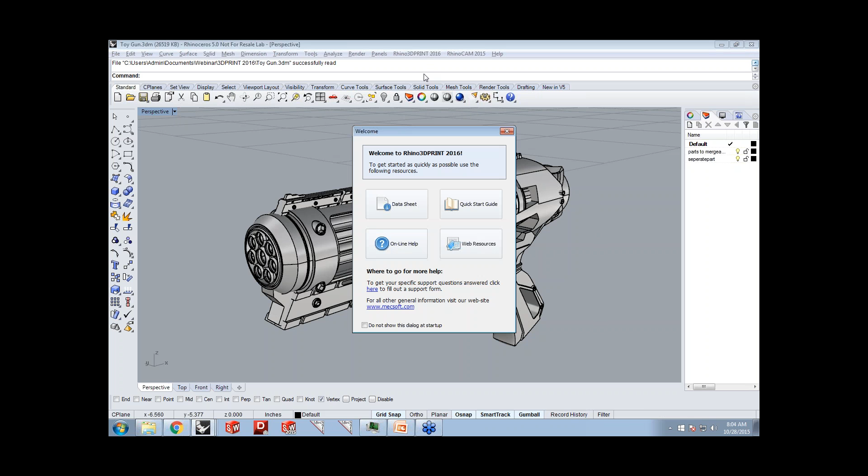Now, once you have Rhinoceros loaded and Rhino 3D print installed, you will notice right at the top of your screen a Rhino 3D print menu appears. Selecting this menu gives you a pull-down menu of options, and when you click on Welcome, this gives you access to the data sheets, quick start guide, your online help, and web resources.

So we're going to click on Rhino 3D print and then select Browser. This displays your Rhino 3D print browser interface in Rhinoceros. The browser by default is docked over to the left side of the screen. You could actually have it floating or docked to any location in your Rhinoceros application interface.

Now, the browser offers 5 main tabs. You have the Create tab, which offers creating tools. You have the mesh primitive modeling tools. You could create mesh from point clouds. You can convert solid surface to mesh geometries.

The Model tab offers you powerful Boolean tools like Boolean unite, subtract, intersection. We've also introduced intersection and split in the 2016 version. And we have split and offset and hull tools as well as slicing. So the offset and split would result in a shell which can be used for your 3D printing applications.

Now the Inspect and Modify tab offers analysis tools where you can perform reflection line analysis, curvature, you can compare two meshes, mesh modification tools like mesh reduction, remeshing, mesh smoothing, and the 2016 version also introduces mesh manipulation where you can individually select areas of the mesh to manipulate it. And as we go through today's webinar, we'll try to touch upon all these topics.

The Repair tab offers a powerful set of mesh repair tools starting with Stitch and Close. AutoFix can be used to automatically fix holes, self-intersection, and incorrectly oriented triangles. We are introducing Manual Fix in the 2016 version where you can manually fix holes using different options for fixing the holes and perform a diagnostic check to check for open edges and other issues on a mesh geometry, and you have options to separate, fix, and flip orientation of mesh.

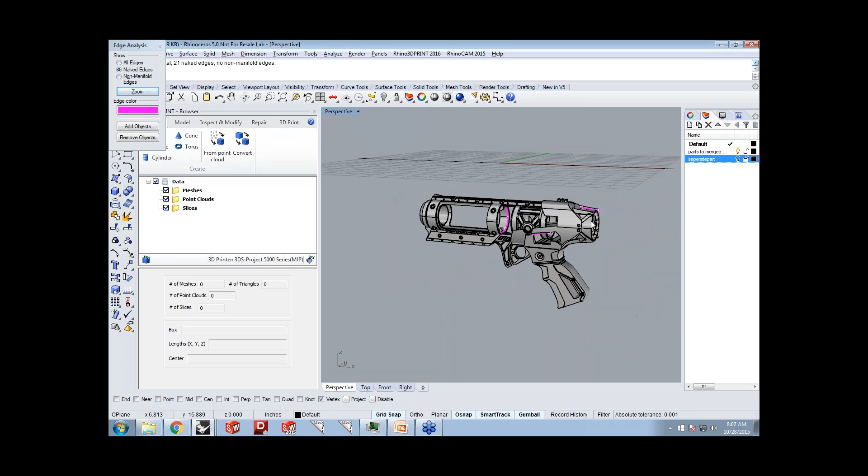And first thing I'm going to do in Rhino is look for open edges. There's a feature called Show Edges where you can actually select the model. Then when you look for open edges, or Rhino calls it naked edges, you'll see that there are several open edges. So just converting this from a polysurface or surface to mesh is not going to make us able to print the model out. Fixing these open edges on a polysurface is going to be a time-consuming process, and then converting it to a mesh.

First step I'm going to do is convert this to a mesh. Now you can convert it using the 3D Print Convert tool in here, or you can use the native Rhino tool if you prefer. You can go from mesh from NURBS object, and you basically select all of your geometries, and then you use the mesh options in here to create a mesh. So let's go ahead and click OK.

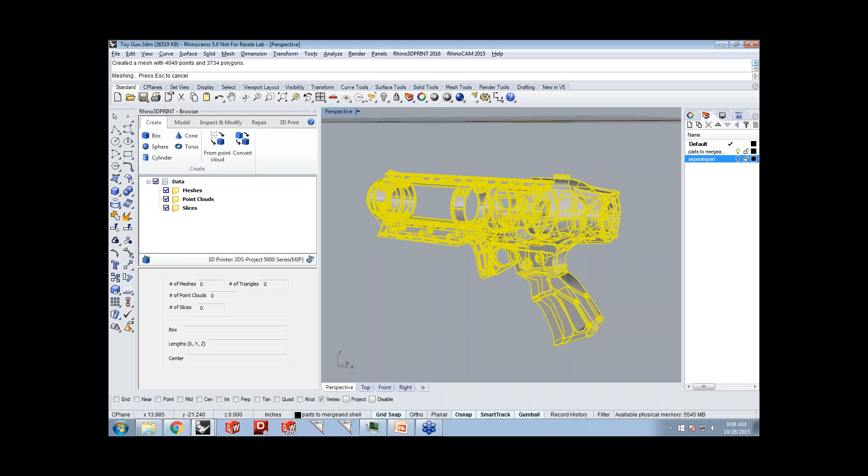And you will now notice that once the mesh is created, the data tree in the 3D print browser will list all of the mesh geometries. So we currently have 26 meshes that were created from this geometry. So I'm going to select these meshes and just have them on a separate layer in Rhino. And I will go ahead and turn off the polysurface geometry in here. So we got all of these meshes.

Now let's go to the Repair tab and run a diagnostic check on this mesh to determine the number of open edges. So I'm going to select the mesh and press enter. Now what I'm looking for is open edges, and I'm going to run some checks. Now you'll notice that the open edges have been identified, and they're showing up on the model marked in red right there. Now to manually fix all of these meshes, it's going to be a time-consuming process.

So we have a very powerful tool in here called AutoFix. So I'm going to use this AutoFix tool, which automatically looks for holes, self-intersections, and any incorrectly oriented triangles, and will automatically fix the mesh. You notice that the AutoFix ran, and it automatically fixed all of the meshes.

Now you'll notice that there are several of these closed meshes on the model. So if you need to print this as one single geometry, we need to merge them or unite them to a closed mesh. So I'm going to go to the Model tab and use the Unite tool, and I'm going to merge all of these meshes into one closed mesh. So now the Unite process resulted in one mesh, and you can see it has close to 180,000 triangles on it.

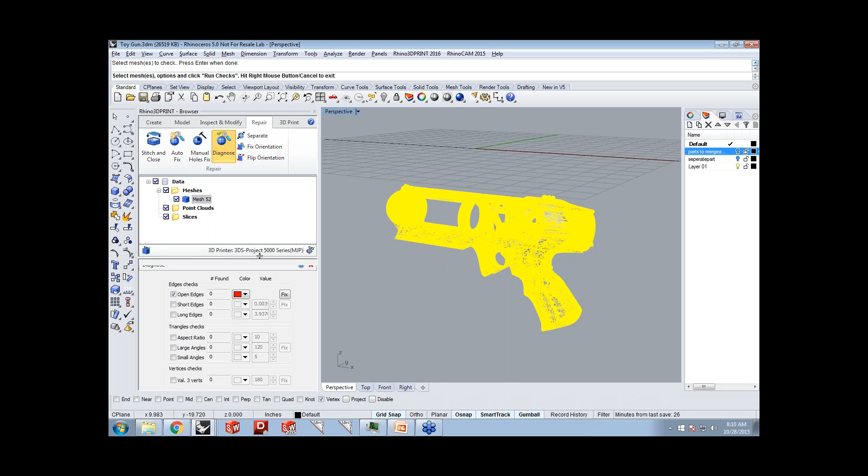Now let's go back and perform a diagnostic on it to make sure all of the meshes are closed in here and see if there are any open edges. So when I run a check, I'm notified that there were no issues detected, which means the mesh is closed. That's great.

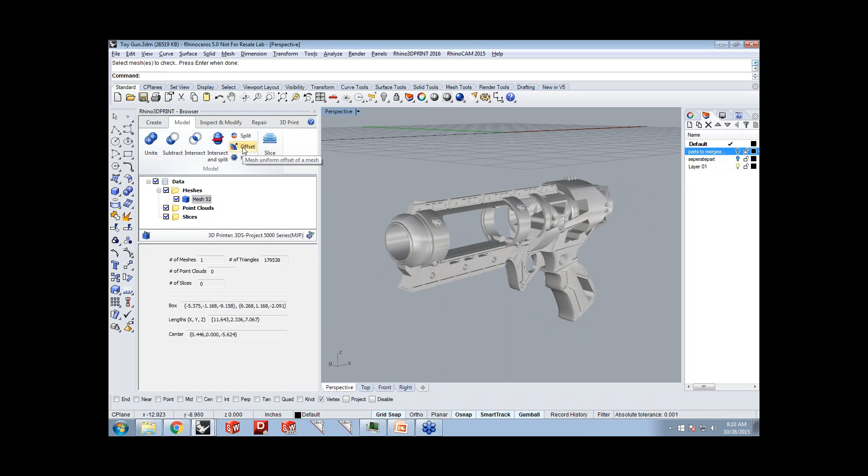Now let's take a look at what are the other nice features that we offer in Rhino 3D Print. Now before you want to print this part, you may want to insert some battery packs, so you may want to have some wall thickness. So one of the ways to create a wall thickness is using a process called offset mesh. So if you go over to the model tab, you'll see the feature called offset mesh. So I'm going to use the offset mesh tool and select the mesh to offset. And the offset parameters in the dialog below allow you to specify your offset distance and a tolerance to offset.

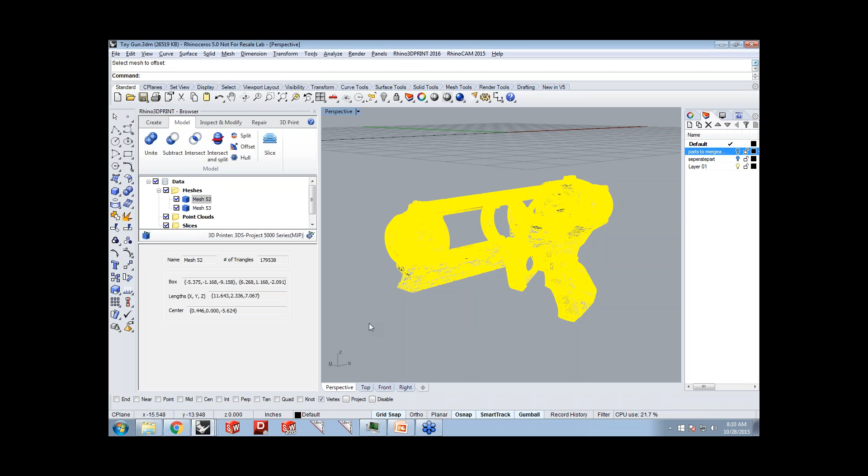Now specifying a negative offset distance and offsetting the mesh will offset the mesh towards the inside, which means it's going to make the resulting mesh smaller than the original mesh. If you specify a positive offset value, it's going to basically make the mesh larger. So you can see that we now have two meshes in the data tree in here. You have your original mesh and you have the offset mesh that's inside. So I'm going to toggle the visibility of these meshes in the tree so I can see the two meshes.

Now one of the nice features that Rhino offers you to view the model is you can actually insert a clipping plane in here, and you can take a look at the two meshes that are created by inserting a clipping plane. So I'm going to go into the visibility tab and quickly add a clipping plane in Rhino from one of the side views. And I'm going to select this clipping plane and I'm going to enable that.

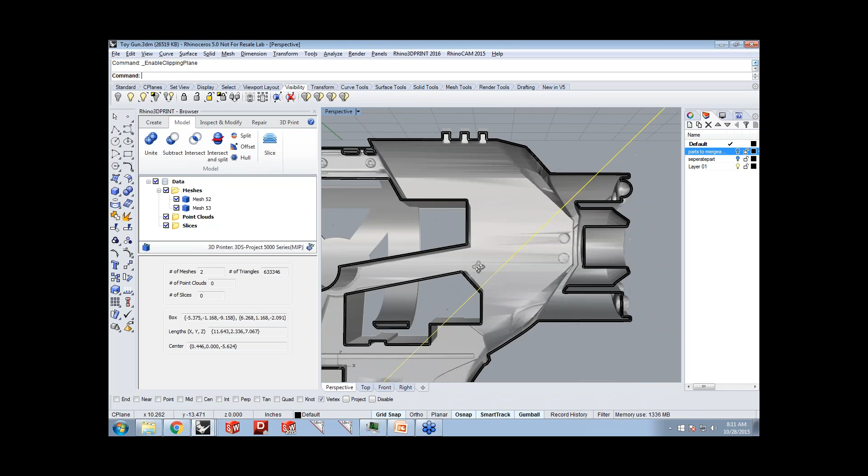So you'll now notice that when you take a closer look at the model, you can see how well the offset is performed, and you can see that the offset has a uniform offset for the offset distance we put in there. So take a look at that. Such a complex model and has a very nice offset on it.

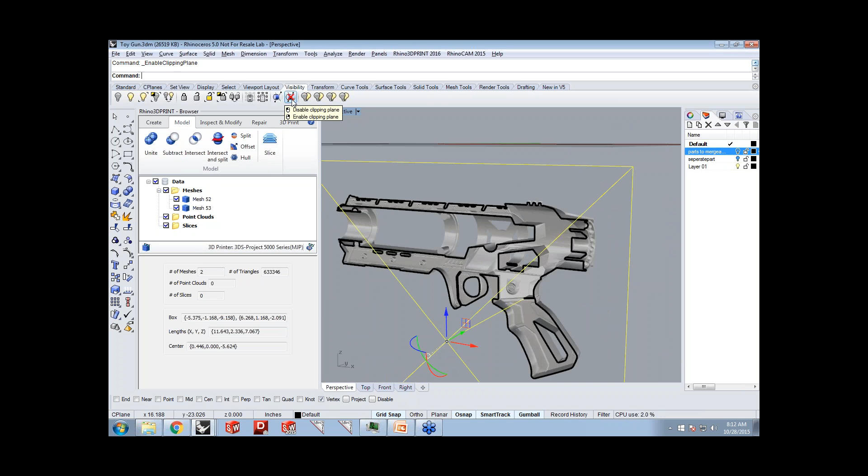Now the next step I'm going to do here is I would like to split the two meshes, the original mesh and the offset mesh, and I would also like to have this gap closed, or I want to cap the gaps between the two. So here's how I'm going to do it. So first let me go ahead and disable the clipping plane in here, and I'm also going to go ahead and disable it from the front view, and I'll hide the clipping plane.

Now we have a powerful split command that's built into the model tab. I'm going to use the split command, and the split basically works in the view that you're currently active on. The splitting plane will be parallel to your active construction plane, and I'm going to select the two meshes to be split, and then when I select the command, I'm given an option to pick the bounding box where I want to split. By default, it'll use the midpoint of the bounding box, so I want to split it right in the center as you see it.

And we have two options, whether you want to cap the results after you split it or do not cap it. So in this particular case, I would like to cap it, and I'm going to select split. Now one of the things I would like to point out here is the splitting process could take anywhere from a few seconds to several minutes as it goes through a complex process of splitting the mesh.

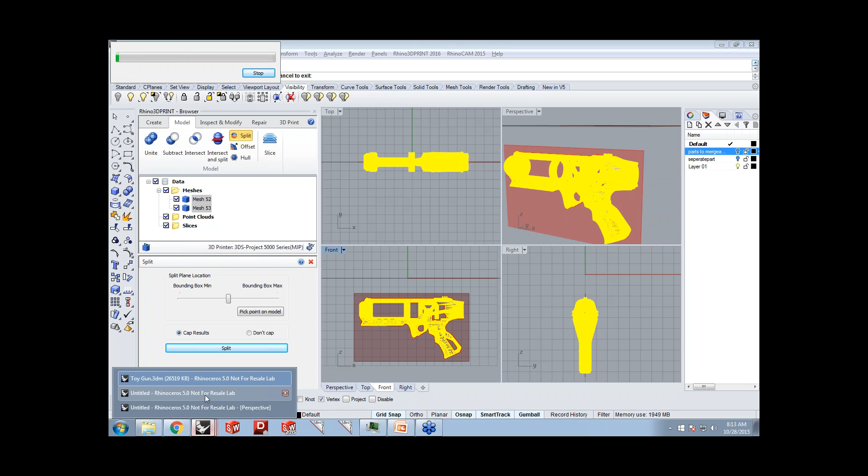Now while we are waiting for the mesh splitting process to be completed in here, what I'm going to do is show you some of the other powerful tools that are offered in our Rhino 3D Print products. So I'm going to go ahead and switch over to another session of Rhino, and I will get back to the part once the splitting process is complete. We'll go back and check on it in a moment.

Now one of the nice tools I want to show you that we have introduced in the 2016 version is how to manually fix meshes. So I'm going to go ahead and bring in an example in here, and as you can see here I have a mesh model, and if I go ahead and perform a diagnostic on the model in here, you will notice that there are several open edges on it.

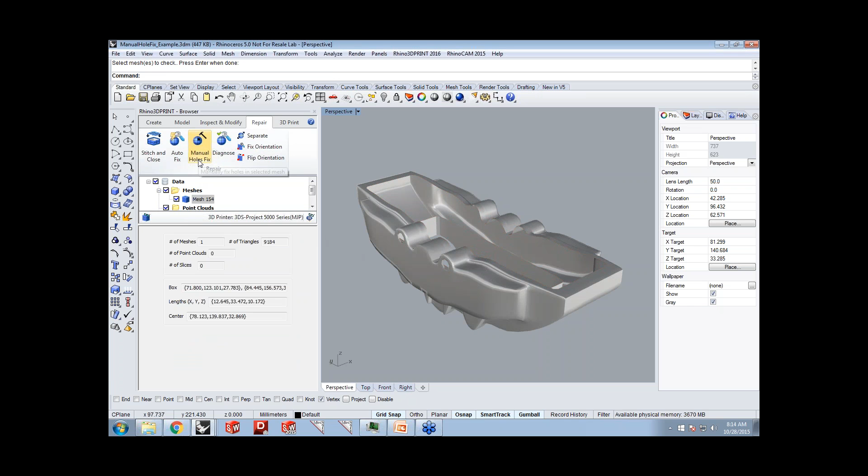Now performing an auto fix will basically just close these meshes, but that's not how you may want to be fixing the holes. So we have added a tool called manual hole fix, where you can actually detect the holes and you can choose what type of fix you would like to apply for it.

Now for example, when I select the hole in the list in here, it highlights the edge where there's a hole, and you can choose what type of fixing you would like to perform. If you select the fix type as fan and preview the fix, it shows the resulting mesh that's going to be added after it's fixed. In this particular case, I could choose planar, and you can see the result of the planar fix.

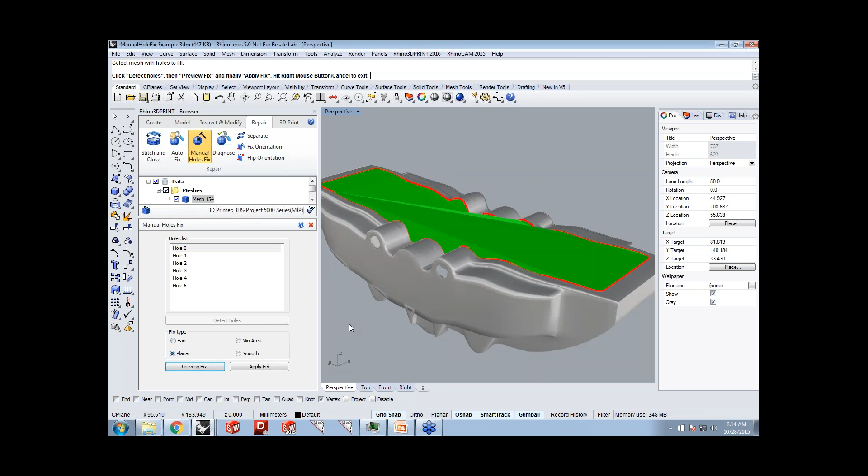Now the ideal option would be here to use a smooth fix. When I preview the fix, you can see that the mesh actually follows the holes that are being fixed, follows the kind of wavy surface on the mesh that you see right there.

So I'm going to hit preview and then apply fix, and you'll notice that this is a very powerful and handy tool where you can pick areas, pick certain holes and fix them the way you need it. So this is one of the new features that are being added in the 2016 version of our 3D print module.

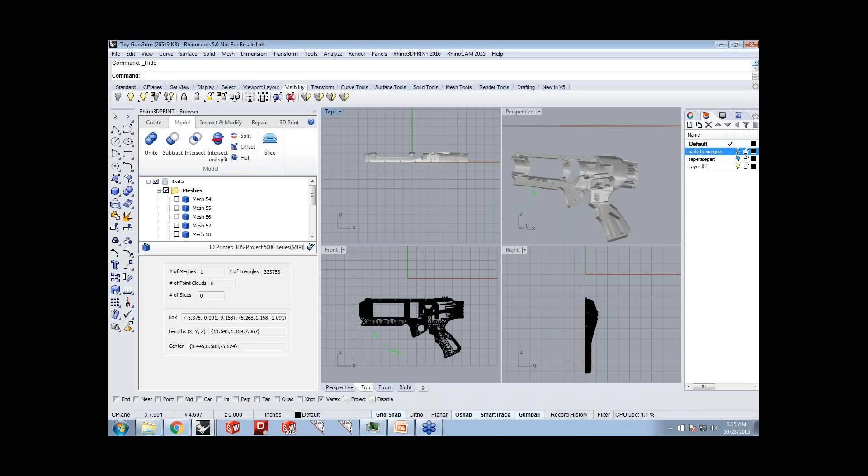Now let's go back and take a look to see if our splitting mesh was done. There you go, it was done. So let me go ahead and take a look at the result of the mesh right here. And now we can see that the splitting process did split the two meshes, and it capped the result. Which means it capped the gap, so you have a wall thickness in here. Now the part is ready for 3D printing.

Now if you want to go ahead and print this part, you would want to first make sure you select your printer in here. So you can go to the 3D print tab, you pick a printer, and we have a list of printers that you can select from. Newer printers can be added to the list. There's an XML file in the install folder where you can go ahead and add new printers, and if you need any help with that, feel free to contact us and we can help you out with that.

Once you select the printer, if the printer reads G code, you can specify the nozzle diameter of your printer and save the information. In this particular process, I'm just going to close it and then display my printer's volume. So once you have the printer's volume displayed, in this particular case, I need to orient the part, so I can use the Gumball or any of Rhino's transformation tools to rotate the part.

So once the part is rotated, I could then use the fit option in here to fit this model into the printer's volume. Select the model, and then I can choose the alignment option. For the Z, I would like to place it to the bottom and then have it centered in X and Y, and I can pick fit.

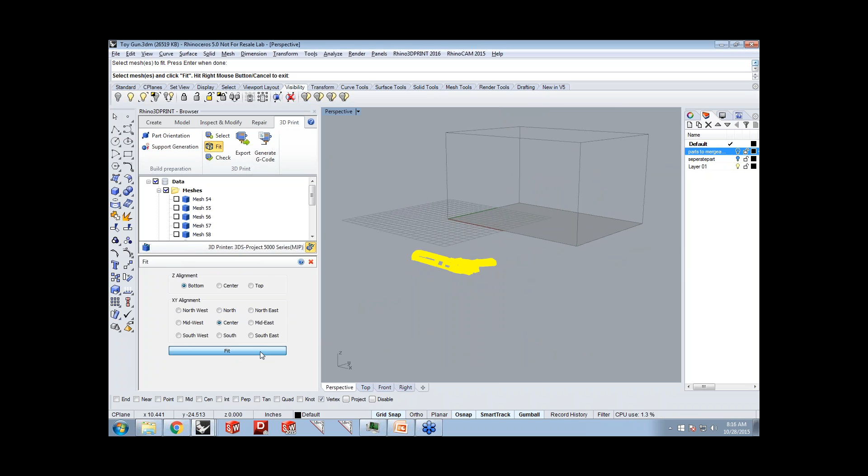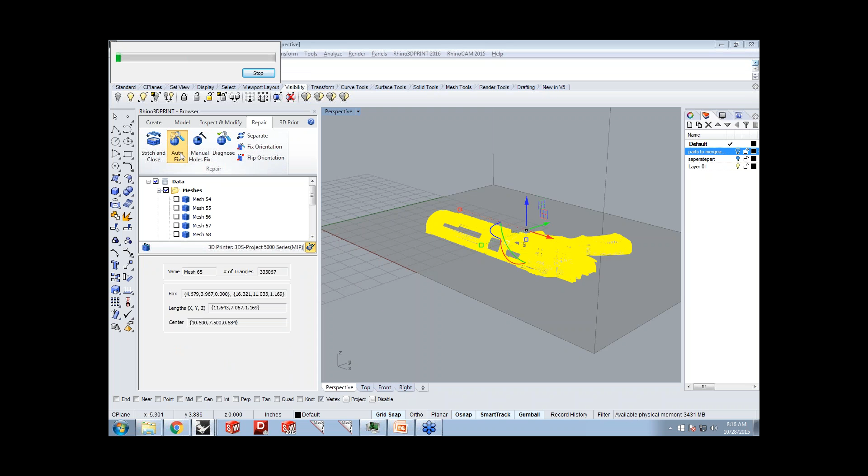Now once it's fit, I can go ahead and perform a check to see if the mesh is closed. I can run a check, and if there are open edges, you'll be notified saying mesh is not closed in here. You can see that the mesh is not closed, so I can go back and do an auto fix on it to close this mesh. And then I can go back and check and then export out as STL, SLA, or AMF to a printer. We'll talk about the G code in just a few minutes.

So this would be a typical workflow of how you would fix the mesh, how you would orient it, how you'd have it aligned, and then finally you want to do an export where you can export out as an STL, SLA, or AMF, or we'll talk about the G code generation in just a few minutes.

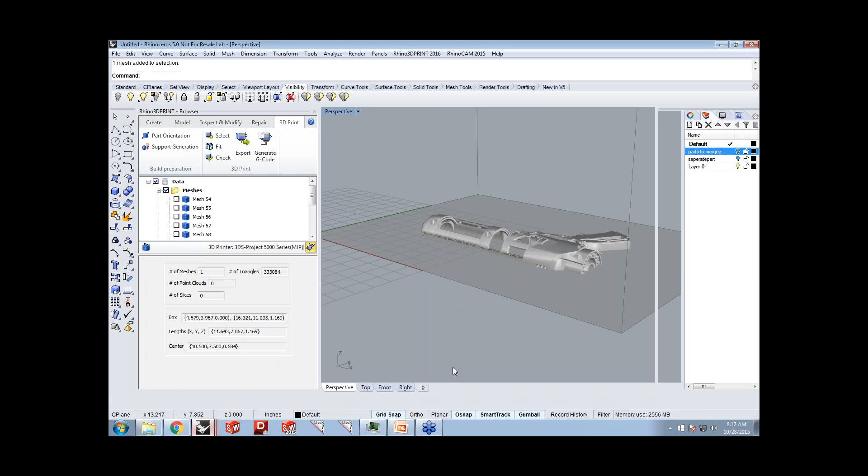Okay, so this would be one of the applications where you would be starting out with a solid surface geometry and convert it into a mesh geometry, fix all the errors and issues that you find in the mesh, and perform offset and split to get the model prepared for 3D printing. Now let's take a look at an example where we would like to work off scan data. So I'm going to go ahead and import in scan data.

So I have a scan data model here, and this particular model is in ASC format. So the spacing or the delimiter is a space. So the way the data is saved in the scan file and the point cloud file is by spaces. Now you can see that as I loaded the point cloud data here, the point cloud information appears in your data tree, and selecting this in the data tree displays the total number of points that are in this particular model. So you got close to 500,000 points on it.

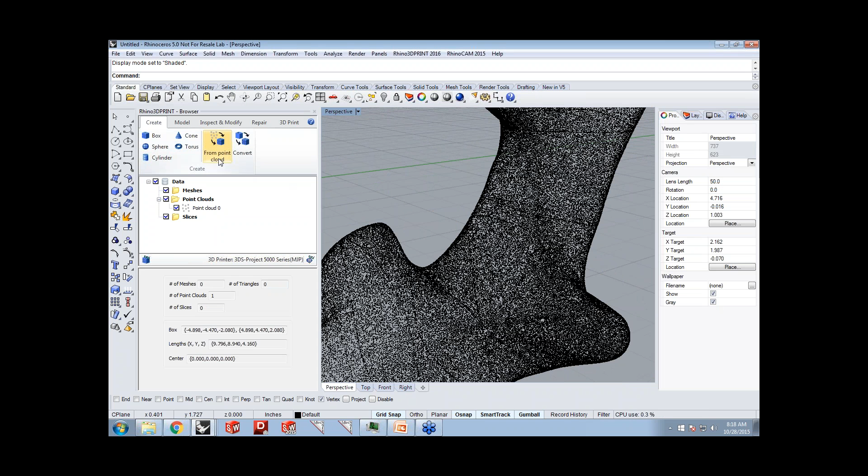Now with just these points, you'll not be able to output these points out to your 3D printer. So you need to basically go through the process of creating a mesh from the point data. So we have a very nice tool called Mesh from Point Cloud. So we're going to select this, select the point cloud, and press enter. Now you can specify the options for creating the mesh. I'm just going to go with these default parameters in here and select create. So in this process, a mesh is created from the point data.

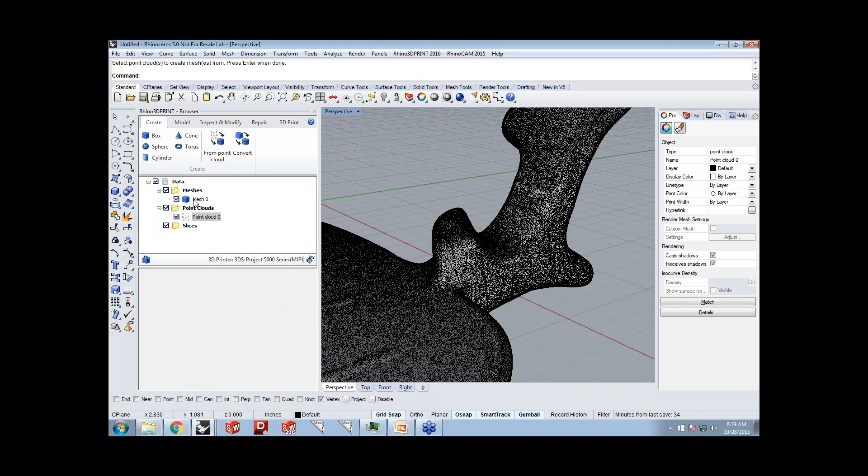So once the mesh is created, the mesh automatically would appear in your data tree under meshes, and you can take a look at the mesh that was created and then see if the mesh is ready for printing. Now you can see that the mesh is already created, and I'm going to go ahead and highlight the mesh. Now just for convenience purposes here, I'm going to turn off the visibility of the point data so it's easier for us to view the mesh, and there's the mesh right there. So it did a pretty good job of creating a mesh. However, the mesh does have several holes on it, as we can tell.

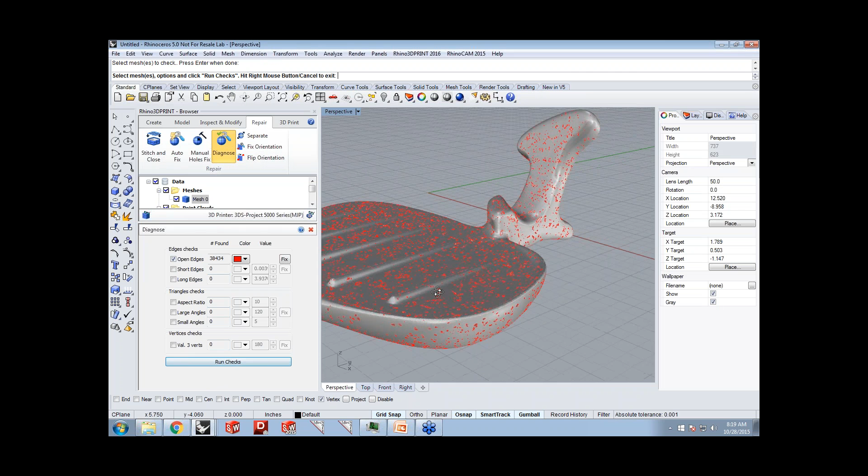So let's go to the repair tab and perform a diagnostic check on it, and let's go take a look at the open edges on it. So I'm going to hit run checks, and you'll now notice that on this particular part there's over 38,000 holes or open edges found in the model. Now to fix these holes or open edges manually, it's going to take several man-hours.

Now the auto fix is again a great powerful tool that'll help you fix these holes and self-intersections on large meshes like these. So I'm going to run the auto fix command in here, then select the mesh, and then right click or press enter, and I'll wait for the autofix to complete. Now this process could take anywhere from a few seconds to a few minutes depending on the number of holes to be fixed and the complexity of the geometry. While we wait on this process to complete, I'm going to go over to another example and show you some of the other powerful features that are offered in Rhino 3D Print.

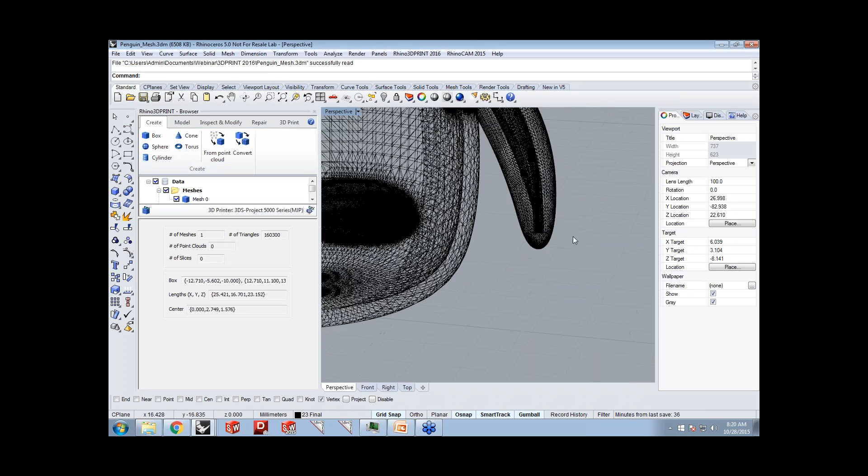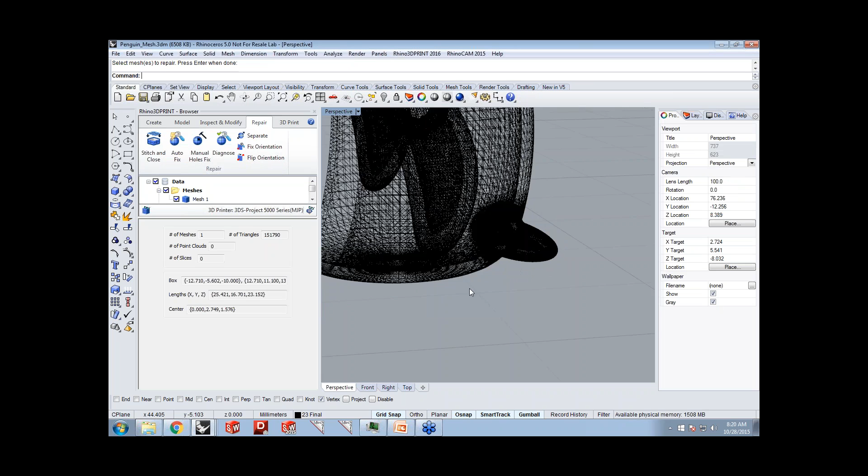Now one of the features I would like to show is how well the autofix can fix self-intersections. So I'm going to go ahead and take this model in here. There's basically two meshes; it was the inside mesh on this model. You can see that there's a self-intersection of the mesh. I'm just viewing it in the wireframe view so all of us can see the self-intersections on the mesh in here. So let me go ahead and run an autofix on this. So I'm going to go over to the Repair tab, pick the autofix option, just grab this mesh right there, and then right-click or press Enter. You will now notice that the autofix automatically fixed those self-intersections. That's one of the great ways to fix self-intersections.

Now let's also take a look at the stitch and close feature. So for this, I'm going to bring in another model where we'll take a look at how the stitch and close feature works. So I'm going to grab this part in here. This was basically a solid model which was converted into a mesh, and you can see that this particular part has over 400 open meshes. So just performing a join is not going to make it a closed mesh.

So we're going to use this powerful feature called Stitch and Close, which is offered in the 3D Print product under the Repair tab. And in this process, I'm going to select all of the meshes, and you'll notice that it's going to stitch all of this into a closed mesh. Now, after the Stitch and Close operation is performed, if we go ahead and run a diagnostic on it, you will notice that there were no open edges identified.

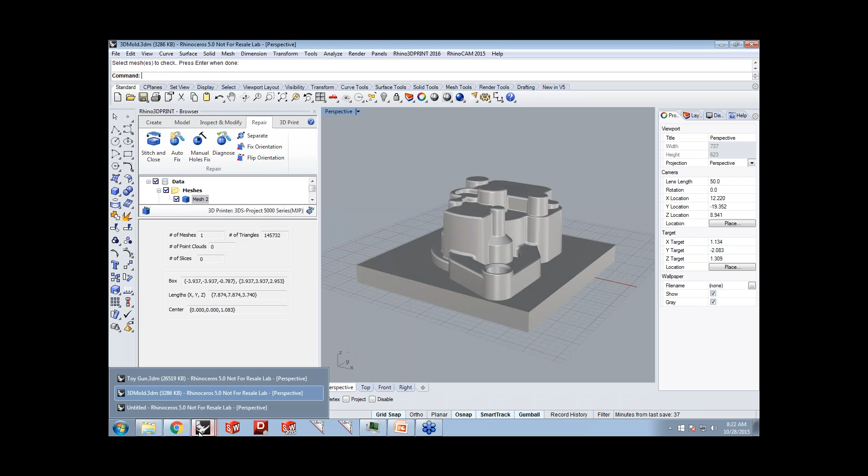There you go. So the Stitch and Close is also another powerful tool to fix meshes in here. Now let's go back to the part, make sure that the autofix was completed in here. So let's go back and take a look at it. And you'll now notice that the autofix fixed all of the holes, self-intersections on this part, and now you have close to 980,000 triangles, which is close to 1 million triangles on it.

Now if you perform a diagnostic on it again, you will notice that if there were any open edges detected, it'll notify you. That's great. There were no issues detected on the model again.

Now, if you want to go ahead and make the mesh smaller, reduce the triangle count to make it easier for printing, one of the tools you could use here under Inspect and Modify is Reduce Mesh. So this basically allows you to reduce the triangle count on the mesh. There's different ways you could do it. So when you do the Reduce Mesh command, you have the option to either reduce them by a percentage of the triangle count, or you can reduce it by a maximum deviation.

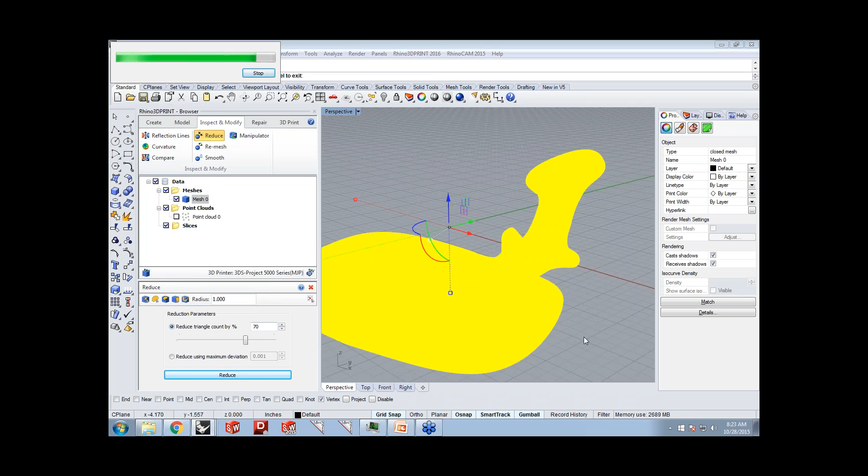So in this process, I'm going to reduce it down by 70%. So I should be looking at a triangle count on this mesh close to maybe 300,000 or less, because we currently have close to 1 million triangles on this mesh. So this is also a very powerful tool. The mesh reduction works very well even on large models, as you see it right here. So the mesh reduction process reduced it from 1 million triangles to close to 300,000 triangles. This is also one of the powerful tools that's offered in the 3D Print module.

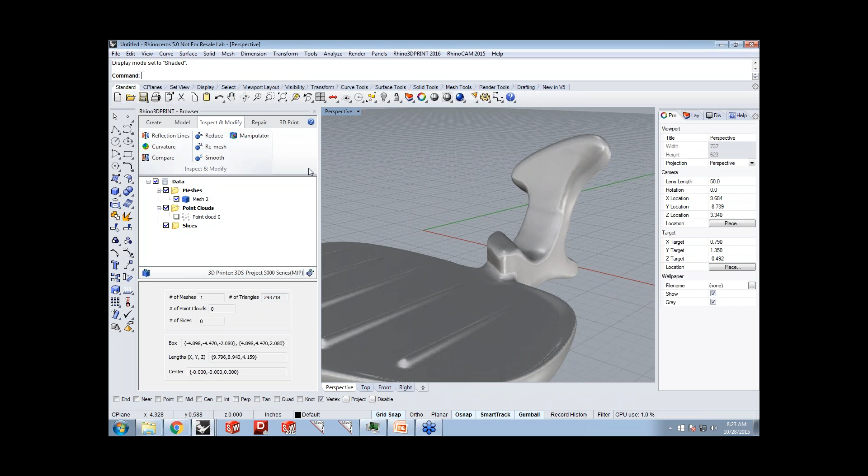Now, let's go ahead and take a look at some of the other modification tools in here. So before I do that, let me go ahead and display the mesh wires, or display the triangles on this model. You can see that the triangles on the mesh are not uniform. So to make it easier for printing, we have a nice tool called Remesh. Selecting Remesh allows you to create uniform triangles on the mesh. There's different ways you can use the remeshing. You can either use uniform or adaptive remeshing.

In this particular process, I'm going to do a uniform remeshing, and I would like to remesh the entire mesh geometry I selected. The 2016 version also offers remesh on only selected areas, which we're going to take a look at on another example as well. So here I'm going to set the edge length to be 50 thousandths, and I'll set the iterations too. Since there aren't any sharp edges on this model, I'm going to leave this option unchecked, and I'll pick Remesh. You will now notice that this process will create uniform triangles, which makes it easier for 3D printing.

So there's your remesh process right there. There it is. Look at that. Very nice. You can also perform mesh smoothing on it to smoothen out areas in the mesh. So you could go back and use the smooth functionality in here, mesh smoothing, select the mesh, and again you have controls where you can smooth a specific area, or if you just want to perform the smoothing on the entire mesh, you specify the number of iterations.

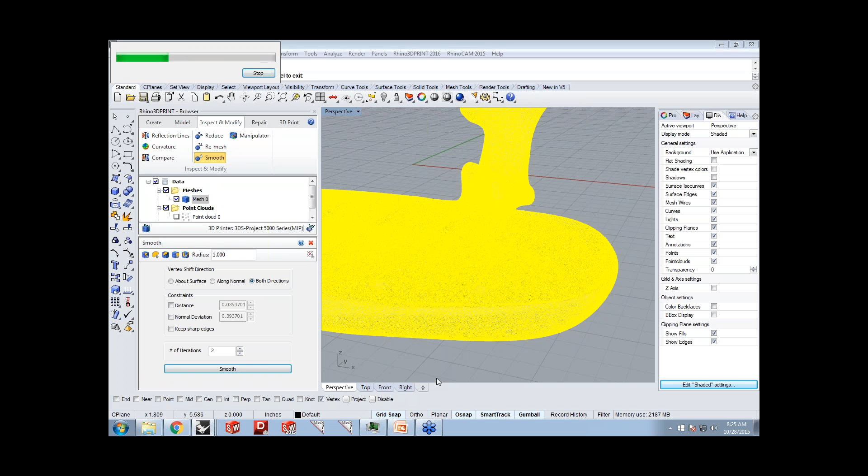In this particular case, I'm going to use mesh smoothing for both directions for the vertex shift, or you can do about surface or along normals and specify these constraints. Let's go ahead and perform a mesh smoothing. Now we looked at how we can apply remeshing, reduce mesh, and mesh smoothing on the entire model. Now let's take a look at how we can perform this on a specific area on a model. So I'm going to go back into this part in here, and we'll take a look at how we can perform the mesh smoothing on a specific area.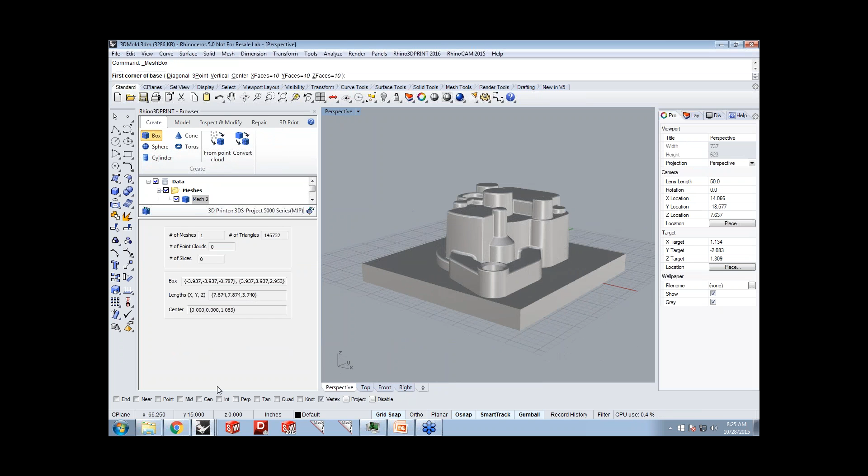Now before I do that, I also wanted to point out one of the powerful tools that Rhino 3D Print offers is the Boolean tools. I'm going to show you how powerful the Boolean tools are that are offered in Rhino 3D Print. First, I would like to create a box so I can Boolean it out from the box. And I'm going to offset this box in the Z. Now we have the box and we have the mold. And I'm going to use the Boolean subtract feature, pick the box, and then pick the mold.

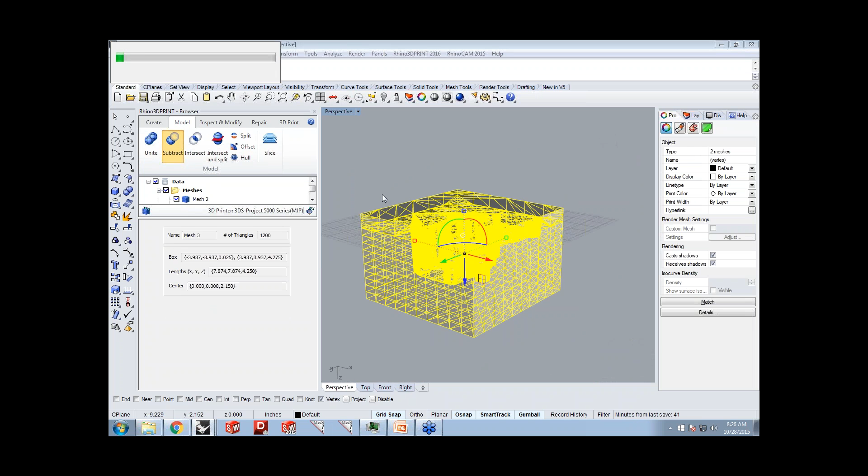And you'll notice that in a fraction of a few seconds, the Boolean is performed, and that's the result of the Boolean. This is a very powerful tool that's also offered in 3D Print module. Now let's go ahead and focus our attention on how we can remesh and reduce mesh on specific areas, and we'll take a look at an example on how this can be done.

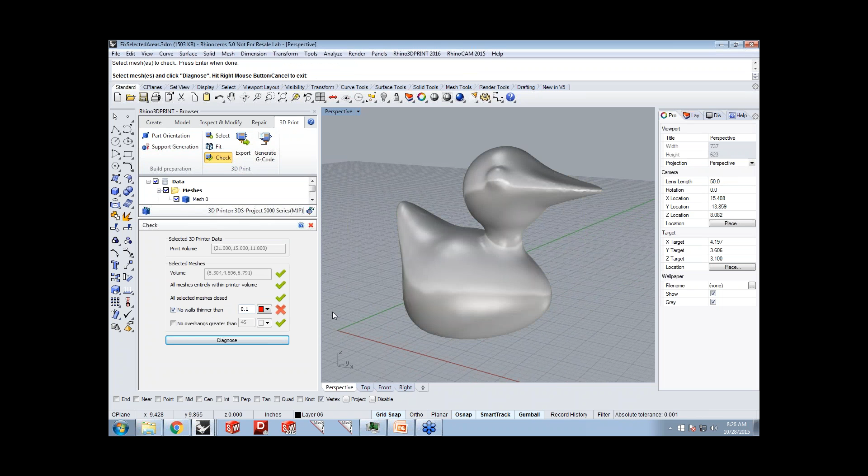So for that, I'm going to go ahead and take this rubber ducky model in here. Now this was basically started out with a point cloud, and then we basically did auto fixing and remeshing on the entire model. So first, I'm going to go ahead and run a check on this model, and let's check for issues on the model. So I can see that there are some thin walls being represented on the model. So if I zoom in on this part, we can take a look at where those thin walls are.

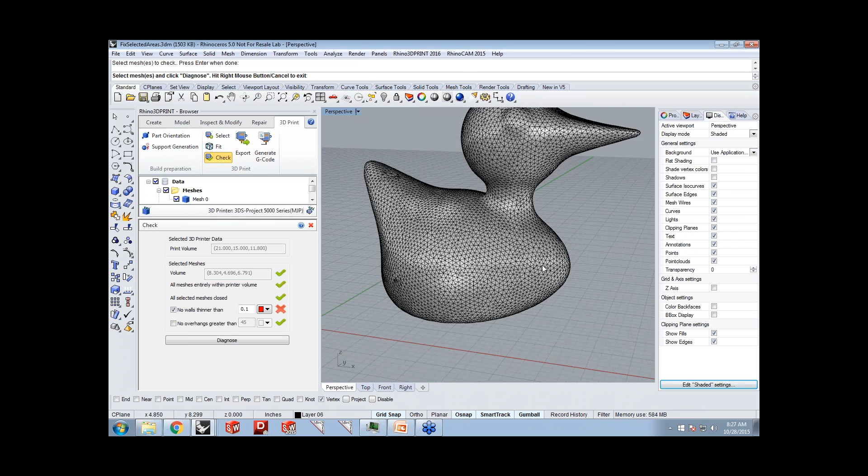Now as you zoom in, you can see these areas on the model show thin walls. So let me go ahead and display the mesh wires on it, so you can see that there is an issue right here. There's a thin wall that's less than the thickness of 0.1, and also over here you can see there's another thin wall on the mesh. Now in order to fix this, I can go through the process of doing some reduce mesh, smoothing, and remeshing.

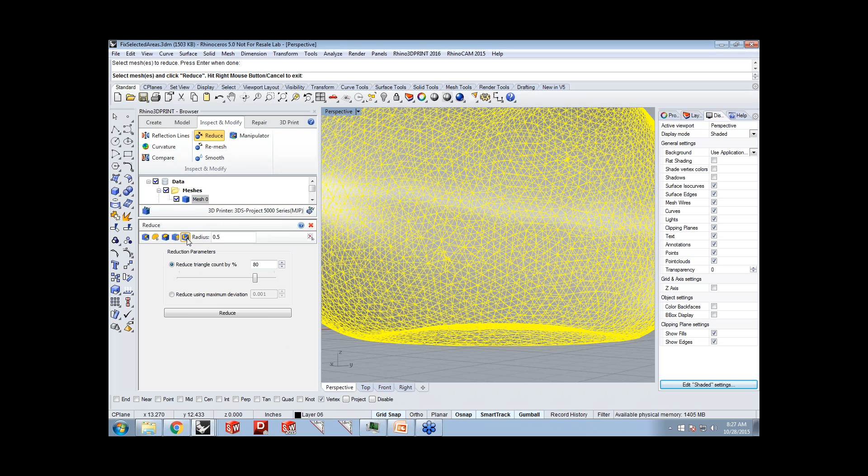So I'm going to go back to the Inspect and Modify tab, and the first thing I'm going to do is reduce mesh. I'll pick this mesh geometry in here, and now I can use these tools where I can select individual triangles on a mesh, or I can do a lasso selection or a planar selection. So in this particular case, I'm going to use a radius selection, and I'll put in a radius of 0.5, and then I'm going to just pick this area on the model. You'll notice that it automatically picked all of the facets within the radius that you specified.

And I would like to go ahead and reduce it down by 30%. I'm going to change it to 30%. I can either use the slider or the spinner controls in here, and it'll perform a reduce. You'll now notice that the issue over here is fixed. Now let's go back over to the other area where we had an issue as well, and repeat the same reduce mesh command. Again, I'm going to use the same radius tool and pick this area right there, and we'll perform a mesh reduction as well.

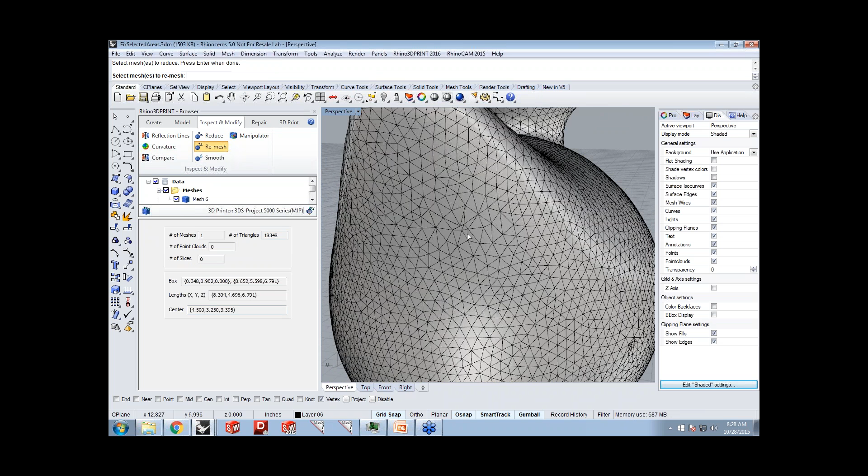Now let's also go ahead and do a remesh in this area. So I'm going to pick the mesh, again use the selection controls, pick this area right in here, and I'll remesh it by specifying an edge length and number of iterations and perform a remesh. So that created a nice uniform mesh as well. Let's go back and check for thin walls again on the model. So let's switch over to the 3D Print tab. I'm going to click on check, select it, and you'll now notice that there were no thin walls. So we were able to fix those thin walls by...

Uday, let me interrupt here. I just wanted to say a note about thin walls. You might be wondering why he's calling these areas thin walls. The way we define thin walls is if triangles are folded on themselves in a mesh, we would consider those as thin walls. As you can plainly see in the model, there are a lot of folds, so adjacent triangles are folded, and if you took a ray from one triangle and shot it through the model, and you hit something else along the way, we would consider that a thin wall, even though in reality you might not think of it as a thin wall. Hope that clarifies that a bit.

Thanks, Uday. Thank you, Joe.

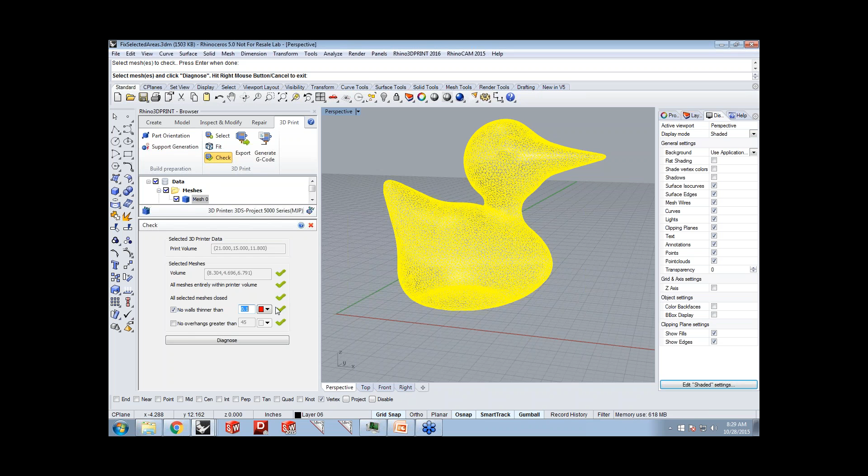So here's a very nice way of fixing specific areas on a mesh using the selection tools that are now offered in the 2016 version of the 3D Print module. Now let's also take a look at the part orientation feature that is also available in 2016. So if you click on part orientation and pick the mesh, you can specify the overhang angle, and it will determine the best part orientation to minimize the overhang angle.

You can hit compute, and this will basically give you the best possible orientations, and it'll also show the overhang area. So if you click on this orientation pull-down menu, right now we were able to see that there are a total of 4 different orientations, and selecting each orientation will also provide you with the information on the overhang area. So you can basically select the orientation that would suit you the best based on the overhang area and the orientation that you'd like to pick.

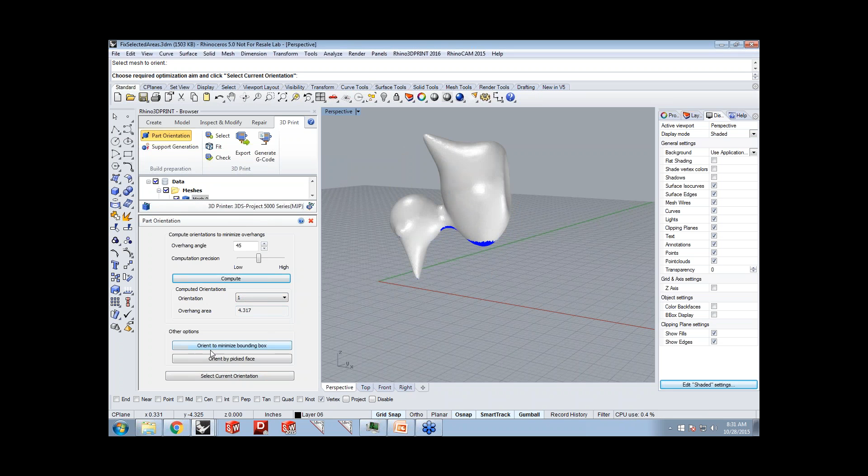So once you specify an orientation, you can hit select current orientation, and it'll basically orient the model automatically for you. Or you can even choose the other options, like you can orient it based on the minimum bounding box, or you can orient by picked face. So these are the part orientation controls that are offered to you in the 2016 version of 3D Print.

Okay, so now let's take a look at how we can perform certain manipulations on the mesh. So one of the things I would like to show is I'm going to bring in a prismatic part in here, and we'll take a look at how we can fix certain areas, like manually modify using the manipulator. So here I got a mesh on this part, so let me go ahead and turn off the mesh wires on it. So this is basically a prismatic part, and I can use even a non-prismatic part. I'm just using this as an example here.

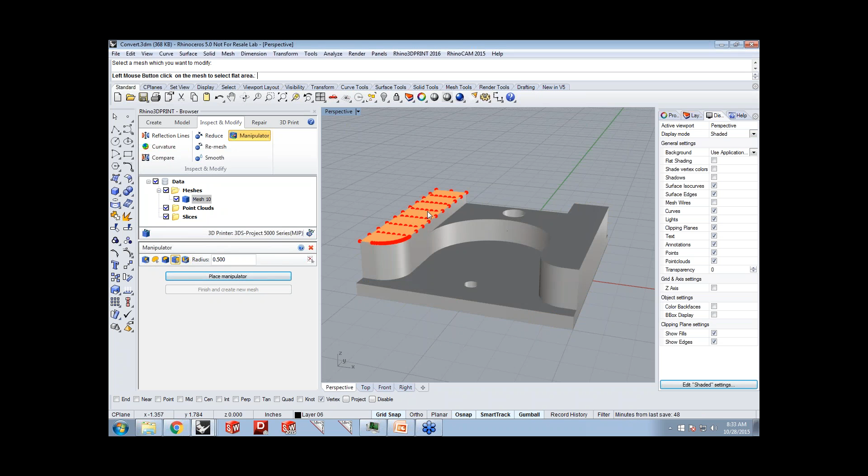And let's go ahead and select the manipulator command. I'm going to go ahead and pick the model. Now once I select it, I have these tools in here where I can pick a planar face. In the previous example we used the paint selection by a radius parameter. In this case I'm going to pick a planar face. I'm just going to go pick this face right in here. So once I have the face selected, it automatically paints the triangles on the face, and I'm going to hit place manipulator, and I'm just going to click on the face again.

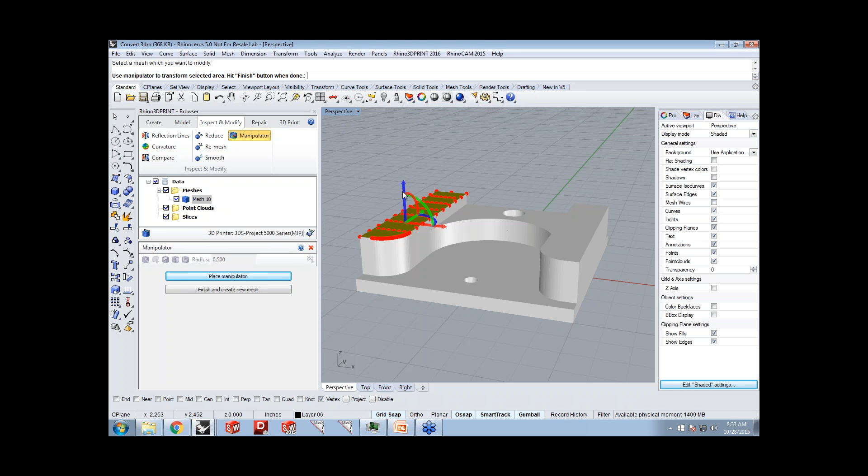You'll now notice that the 3D print module displays a manipulator, very similar to what you've seen in Rhino as your gumball. I'm sorry, I actually dropped the selection, so let me go back and reselect it. And you'll notice that these controls allow you to manipulate the mesh. I can either push and pull, I can click on it and enter in a precise value, I can also perform a rotation of this mesh in here. So you can actually use these tools to modify the mesh. So I have the mesh modified right there, and then I can say finish and create new mesh. It automatically modifies your existing mesh.

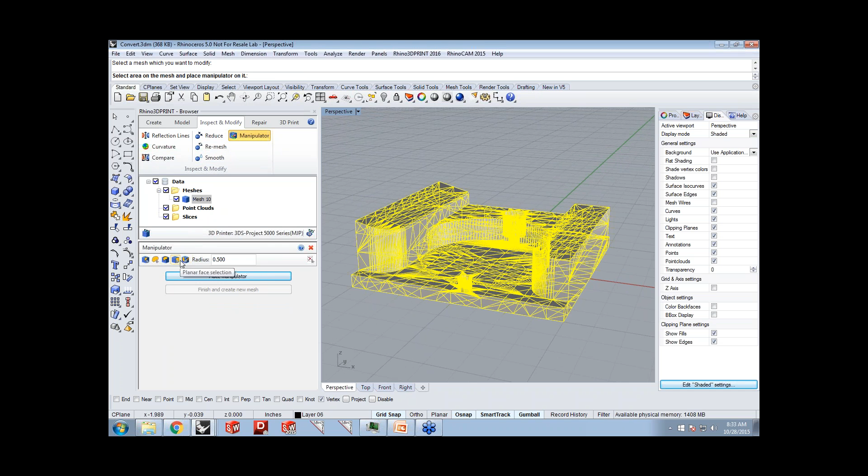I can also do the same thing in here. So I could run the manipulator again, go pick the geometry. I can pick a planar face. I can also pick individual triangles on it. I'm going to pick this face right there, place the manipulator on the face, and I can actually modify the geometry. So this is also a very powerful tool that's offered to you in the 2016 version of the 3D print product. So you can use the manipulator to pick individual areas on a mesh to modify it, and also those selections are offered in mesh reduction, remeshing, and also mesh smoothing.

We've also added a new tool called compare, where you can compare 2 meshes by selecting the original mesh and the mesh that you want to compare with, and it shows you a result of the comparison. Now the next powerful feature we would like to go over in our 3D print module is the support generation tools. We're going to talk about that in just a moment, and also the G-code generation as well. So let's go ahead and take a look at a model in here. So I'm going to go ahead and bring in this bunny.

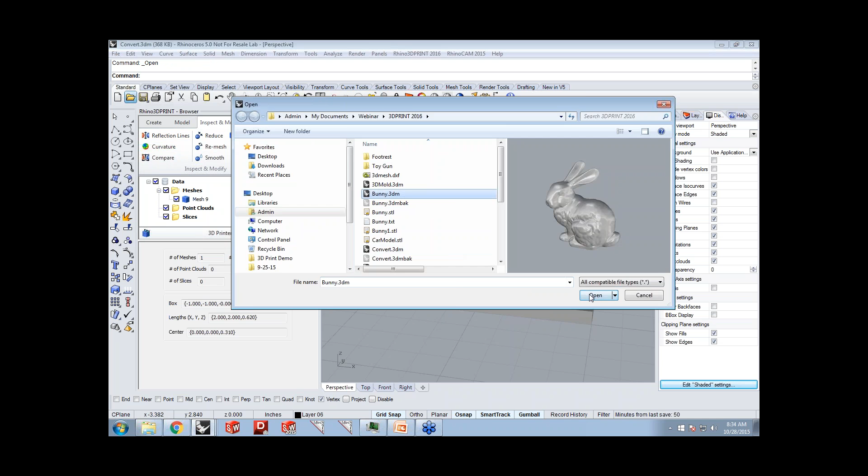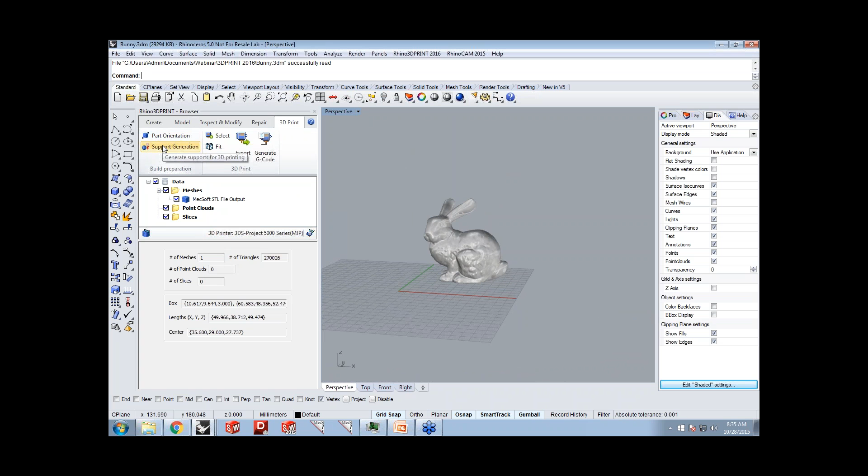And as you can see here, we have the part loaded. And we also have a printer selected, so the mesh is already oriented and also it is placed inside the printer's volume. So I'm going to go into the 3D Print tab and take a look at our new support generation tools here. So first thing I'm going to do is click on support generation, and this prompts to make a selection. So we're going to select the mesh, and in the support generation parameters, you have the options to

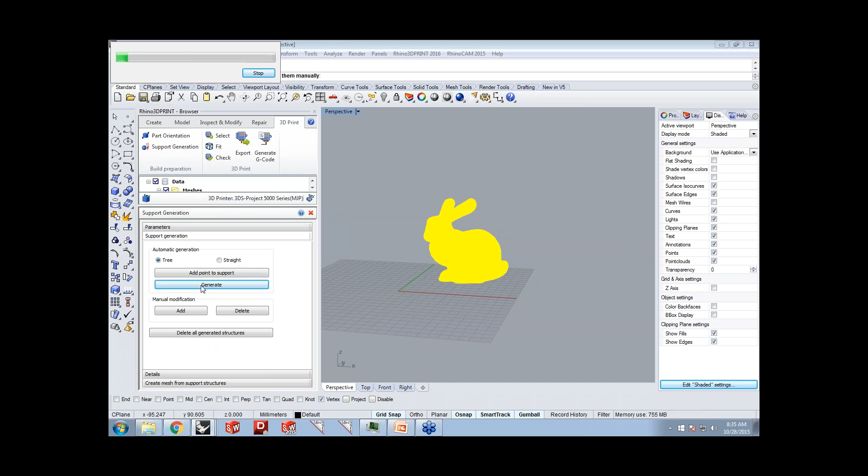specify your overhang angle, the maximum angle, and then you can specify the parameters like your support diameter, your distance, the sampling distance, the connector diameter, connector height, and the base diameter, base height. And if you go to the support generation tab, you have options for your support generation. What type of support would you like to create? Now let's go ahead and hit generate in here. And you will now notice that it is computing the supports based on the overhang angle and the specified parameters.

Now we can take a look at the supports in the viewport. It's previewing the supports, and this would be the supports that will be created. Now since we chose the support structure as a tree, basically it's branching out as you see it right here. Now if you change this to straight and then hit generate, you'll see the difference in the type of supports being generated. Now let's go back to the tree structure. Let's generate it again.

And now you'll notice that over here, the supports, the base connectors on the mesh are set to use the option as minimize. So it'll try to minimize applying the connectors through the mesh. Now there's an option if you want to disallow it, you can select disallow, go back to support generation, and then when you pick generate, it is not going to have any base connectors on the mesh.

So you will notice that the support generation tool offers you a variety of different controls in here. Now you can notice that the base connectors are not on the mesh. They're not allowed to be on the mesh by selecting the disallow option, or you have an option to allow it, or the default is set to minimize, which you can change in here.

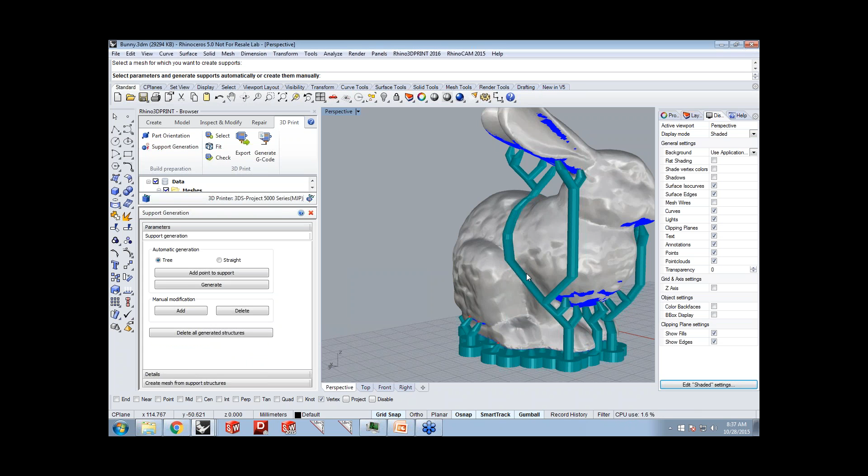Now we can also add additional points to the support in here. So you can go back in here and say you want to add a point, and I can actually graphically pick these points on a model. So I can select additional points in here, and then when I pick generate, it'll add additional supports in these areas. Now these are very nice tools that are offered for your support generation in the 3D Print module. Starting with the 2016 version, these features will be available. So you can add and delete, and also manually modify those supports.

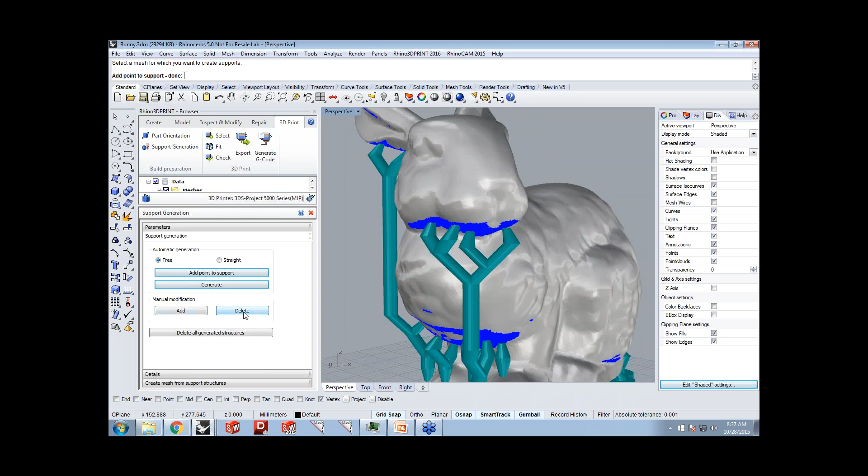Now once you have these supports created and you're happy with the supports that have been modeled in here, you can go to the details tab, which would then provide you with information about the support structure characteristics. It shows you the total volume and then the length of the supports, and all of these are in the units that you're currently working in. So you could be working in inches, millimeters, or any units that are supported in Rhinoceros. So there are your supports.

Now what can we do with these supports once they're created? So you go into the create mesh from support structures. You have options whether you want to create all of these supports and export them as a separate mesh, or would you like to have the supports united with the main mesh, which is the part geometry, or you can basically create each of these supports as a separate mesh. So here in this example, I'm just going to use create as a separate mesh, and then I hit create meshes.

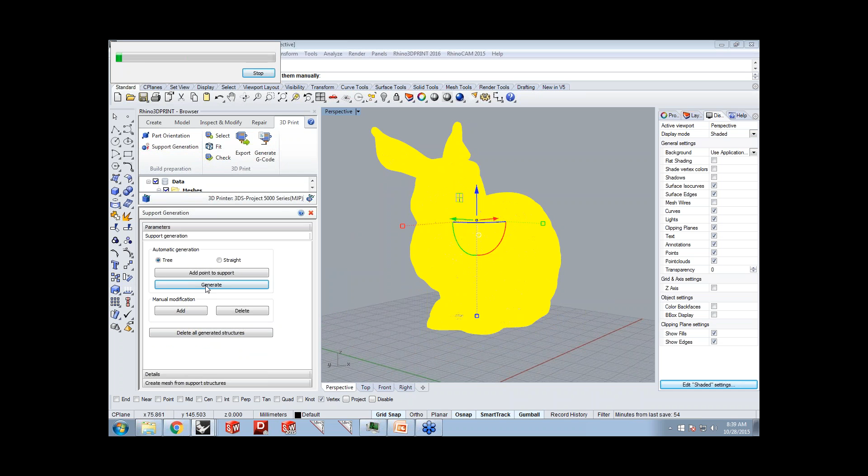You'll notice that all of the supports are part of one mesh, and the main geometry is on a separate mesh. So the supports are being created. Now if you would like to go back and actually have this support defined as part of the main mesh, you can go back to your support generation and you can choose the option to unite it with the main mesh. So let's go ahead and do that.

So I'm going to go back and recreate the supports, go back into this tab and say create and unite with the part, and hit create meshes. Now the supports will be united with the mesh geometry. And there they are. So it's united. Now we have the supports created.

Now let's go into the process of generating G-code. This is a new feature that's being introduced in the 2016 version, G-code generation for 3D printing. So I'm going to go into generate G-code.

Now before I do a generate G-code, it's recommended that I go into my printer selection and make sure I have my printer nozzle diameter defined, set correctly in here. If you need to update it, go ahead and set the nozzle diameter, and then you'll be able to hit save and this information gets saved into your printer list. So we have the printer selected in here.

Now I could go ahead and select Generate G-code, and I pick the part I would like to generate G-code for, and then press Enter. Here you have the print parameters. You have the options to specify your layer height. You can set the parameters. You have the options to specify the solid layers at the top. We have 2 layers set at the top and 2 layers set at the bottom.

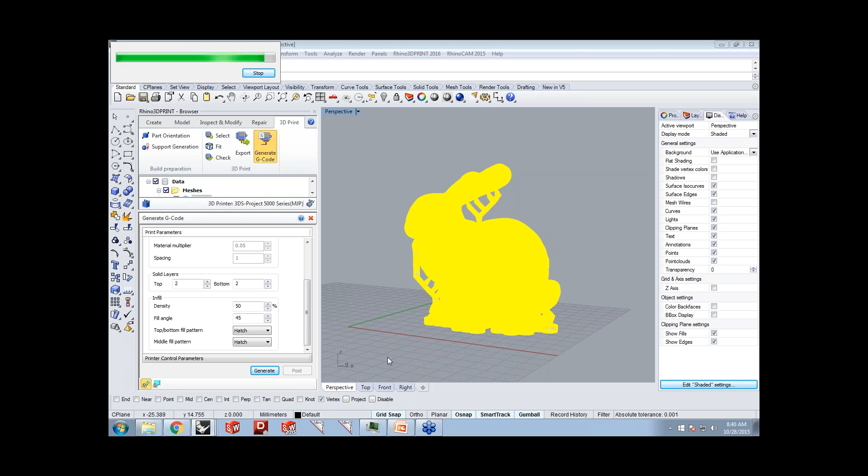You can specify your density and the pattern for the toolpath, and you can go into generate, and this process will compute your toolpaths, and the toolpaths will be previewed on the graphic screen. So the computation is in progress, and you'll notice that in just a moment the toolpaths will be computed. There they are. There's your toolpath.

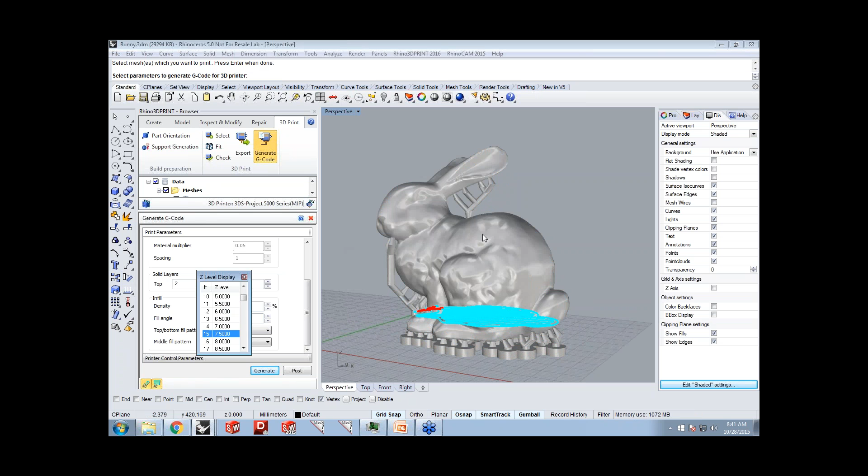And one of the things you could also do is view the toolpath. You can toggle the display of the toolpath visibility in here, and also view the toolpath as you go for each level. So since we put in a layer height of 0.5 millimeter in here as an example, you can see all of your toolpaths right there. You can look them up by each level, which is basically each layer in here.

So once you have these toolpaths created, the next step is to post-process these. So you can click on Post, and this automatically displays your Post and Save dialog. We have a handful of posts in here at the moment, so I'm going to use the Generate G-code output format, and I can specify my output file extension. I could use .nc or whatever is the preferred extension your controller expects, and I'm going to select Post.

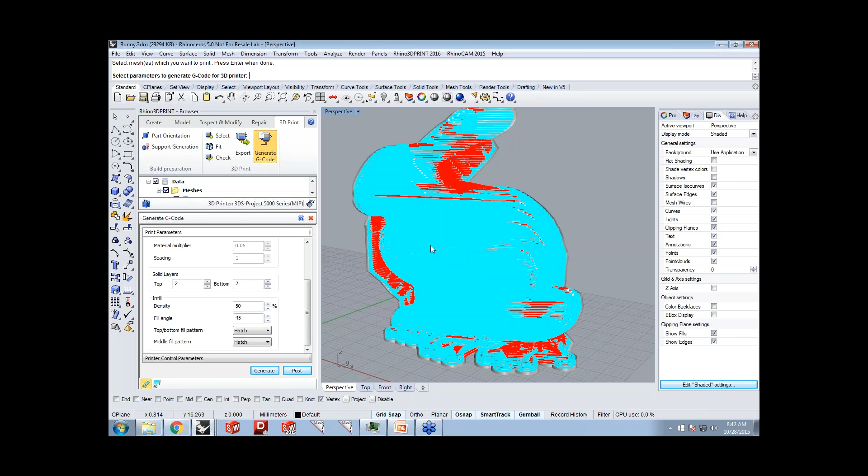I'm being prompted in here if I wish to scale the toolpath to match the active printer units. The printer units could be set in inches. The part I have here is in millimeters, so if I select yes, it'll automatically scale your G-code to be the units that your printer is defined to be in. So there's your G-code right there for the part we just programmed.

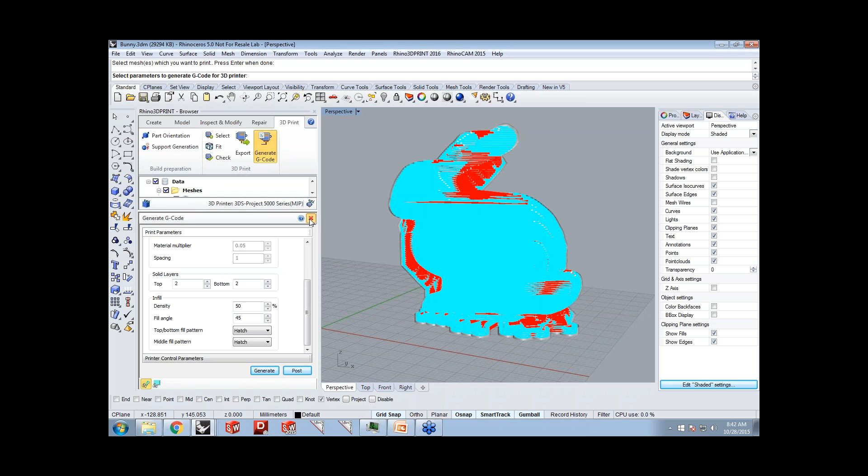Now the mesh modeling tools that are offered here in Rhino 3D Print can also be used in your CNC milling process. So you can prepare these meshes, fix the mesh, and then use it to generate toolpaths in either RhinoCAM, the plugin for Rhino, or VisualCAM, which is part of our standalone Visual CAD/CAM module. So this basically gives you an overview of the different tools that are being offered in our 3D Print 2016 module.

Now I would like to switch the interface over to a standalone system so I could show you how the interface is, and the workflow looks exactly the same or very similar, except the difference is instead of running inside of Rhino, it's going to be a standalone system where you have a handful of CAD tools for your CAD modeling, and all of your 3D print tools can be found on this 3D print browser. So the workflow would be very similar in here.

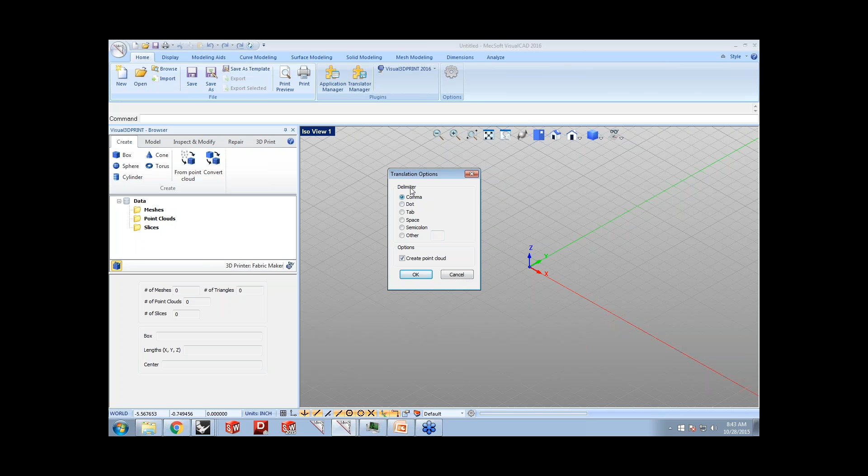So I can take an example and go through the process of how to create a mesh and work with the meshes. So I'm going to use this example of a point cloud data in here, bring in a geometry. So the workflow would be very similar. You can go through the process of creating a mesh from the cloud. You specify the parameters for creating them, and you can go ahead and enter in all of your mesh creation options, and there's your mesh.

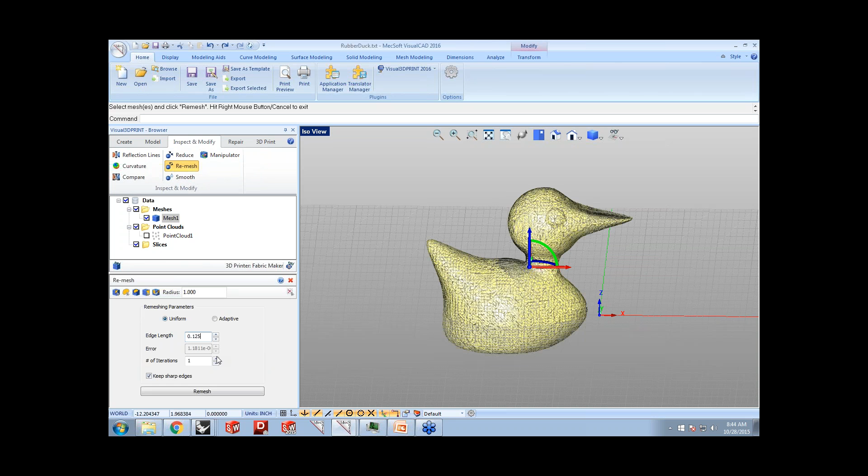As you notice here, the workflow is very similar to what you noticed in the Rhino 3D Print plugin. So the same browsers, the same tabs, the same workflow on the interface. So once you have the mesh created, we can do an auto fix in here, which automatically fixes these meshes, and then you can perform remeshing to refine the mesh to create uniform triangles, where you can specify your parameters like your edge length and the number of iterations, and there they are. So this would be a typical process in here to work with the meshes.

Now you can also go ahead and specify a mesh smoothing to specific areas, or you can smooth out the entire model. So you have all of these controls and options available in our standalone system exactly as what you saw in Rhino 3D Print.

So this basically gives you an overview of our 3D print product, and with this I would like to go ahead and transfer this back to Anita Anand, who is a VP of Sales. Thanks, Uday. That was a lot of information, and we got a lot of excited comments here about the new features that were added, especially the supports and the G-code generation.

Now, there were some questions about adding different printers to the list of printers that we already have included with our product. Maybe you want to touch a little bit on that, so we can let our customers know. I was asking about the new printer list. Anyone who has other printers other than what we have on our list, how can they get their printers added to this list? Sure, that's a great question.

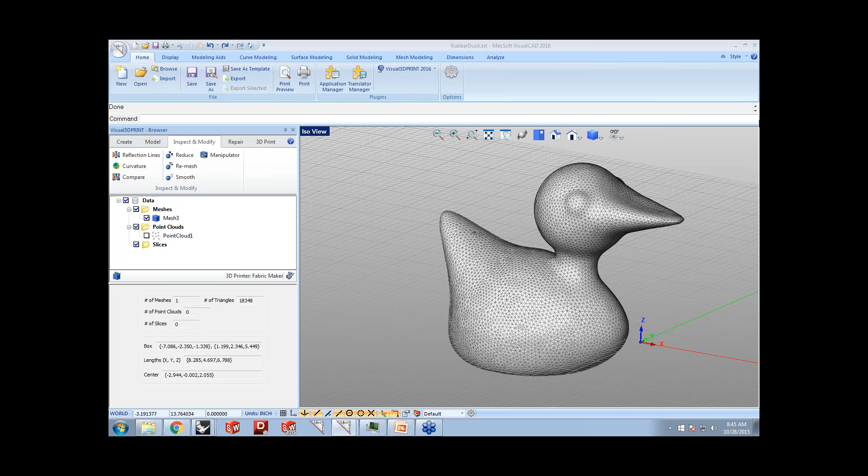So if you click on the select from the 3D print tab, or if you just click on the 3D printer list in here, it basically displays a dialog which allows you to select a 3D printer. So if the printer that you're looking for is not found on this list, we can add new printers to the list, and I will show you where the printer data file is saved, which would allow you to add new printers to the list. It'll be saved in your app data folder, which I'm going to get to in just a moment.

And you'll be able to see a folder if you go to your app data folder for Rhino 3D Print 2016, and then under the 3D printing folder, there's an XML file called 3D printers info.xml, and you can edit this with any editor. You could use Notepad or any XML editor, and in this particular case, I'm just going to use the standard Notepad in here, and this is where you'll find information about the printer.

So you can basically go ahead and add a new printer, just maintain the same format. You specify the units that your printer supports, you specify the printer's volume, which is your length, width, and height, and you can input the nozzle information, the nozzle diameter in here. So once this XML file is updated, the next time you run the application, it'll automatically display your printer in the list of printers to select from. I hope I was able to answer your question, sir.

Thank you. And I'd also like to add that G-code generation uses our CAM G-code generator, and it can be customized quite extensively. So if you need any customization done to your file, it's easy to get done. There's another one here that perhaps either Uday or Joe. Anita, can I interrupt here? Sure thing. Go ahead. Can Uday just show the customization for people who might not be familiar with our CAM post-process generator? Is that possible, Uday?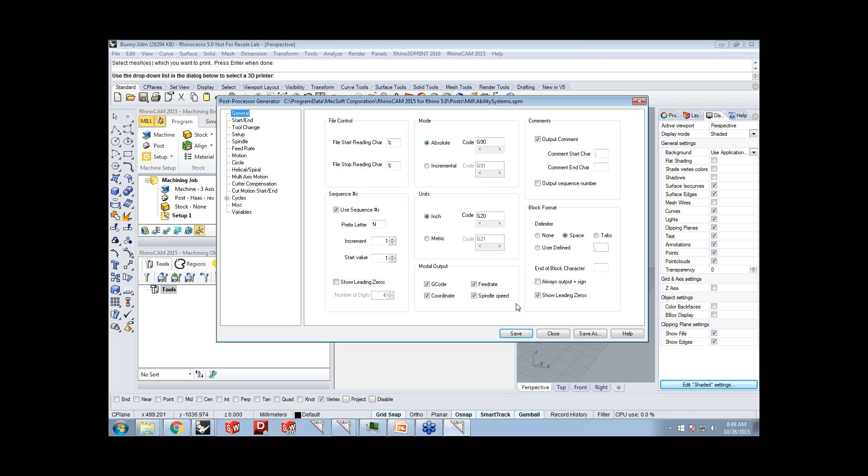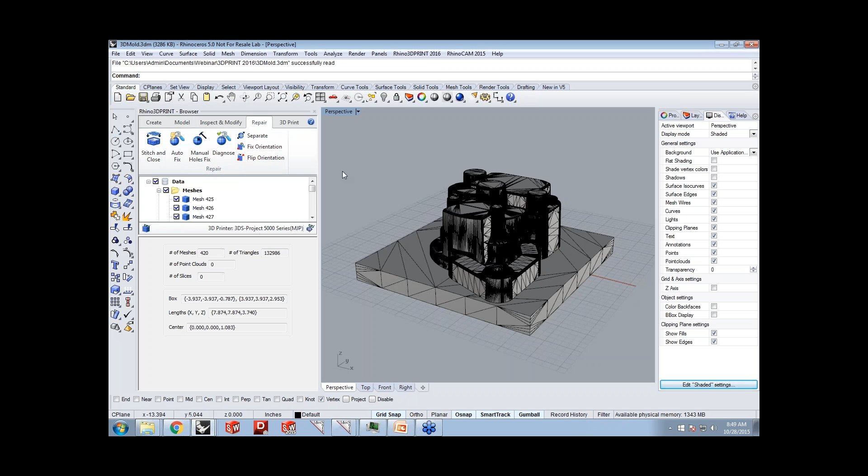Okay, there's another one here that maybe you can address. What are the benefits of Rhino 3D Print's Mesh Boolean tools over Rhino's native Mesh Boolean tools? Well, folks, that's a great question, and just to give you a quick demonstration of how powerful the Rhino 3D Print Mesh Boolean tools are, I'm going to go back to one of these models that you may have already noticed earlier today, and I'm going to perform the Boolean using Rhino's tool, since you already saw the Boolean that we performed using Rhino 3D Print.

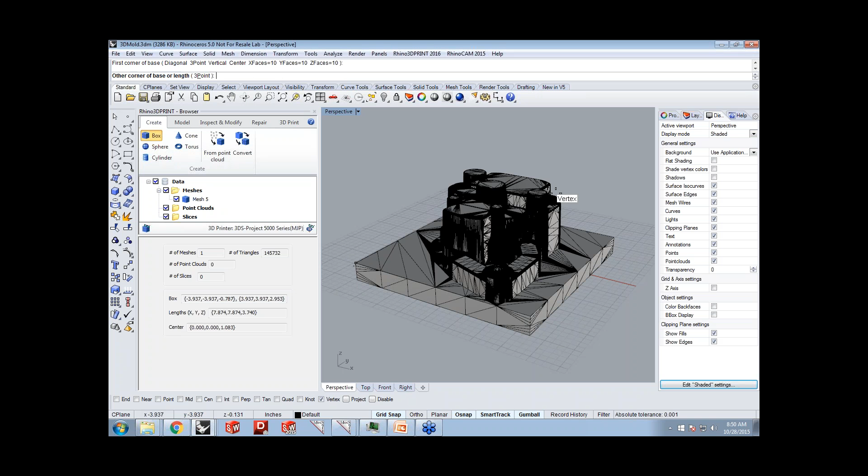So first, let me go ahead and perform a stitch and close on this model in here, and once the stitch and close has been performed, I'm going to go ahead and create a mesh object so I can use that to Boolean it with. So I'm going to basically do the same thing I did with 3D Print, but this time I'm going to use Rhino's native mesh Boolean tools to perform a Boolean operation on it.

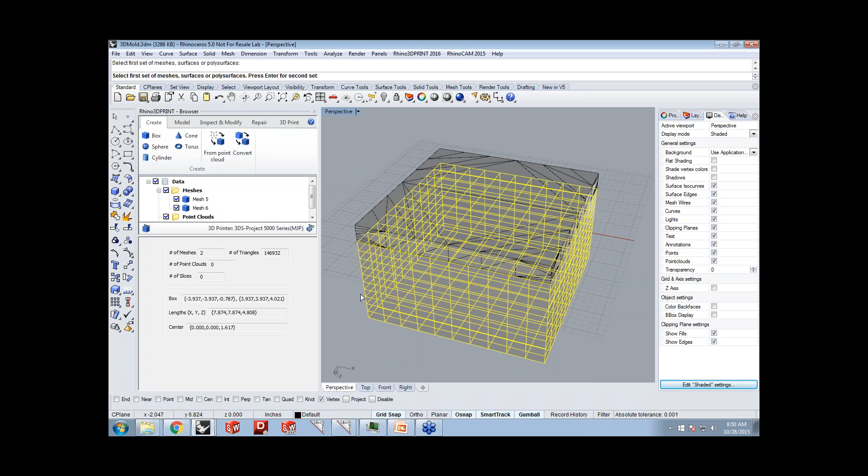So let's go into Rhino's mesh Boolean tools. If you go up to Mesh and use the mesh Boolean, you can do a difference on it. So I'm going to pick the same box as my base mesh, and then pick the mold as the second mesh. And when I perform the Boolean, you will notice that the result of the Boolean is probably not what you would have expected.

Now if I go back and perform the same Boolean using the Boolean tools offered in Rhino 3D Print, you can see that the Boolean tools are more powerful, more robust, and quick. So it works great even for complex geometry. This is one of the examples of the powerful mesh Boolean tools that are offered in Rhino 3D Print.

Okay. Joe, would you like to add anything about the printer output formats that we support? Yeah, I think Uday can handle that pretty quickly. He can actually show it on the product, so I'll let him do that.

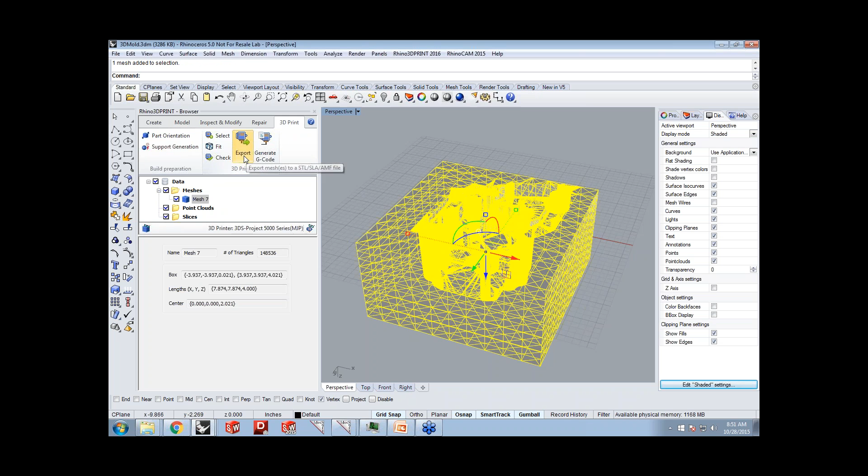Okay. Thank you. So if we go up to the 3D Print tab, we have this option to use export. Selecting export will let you export your mesh geometry either as an STL, SLA, or AMF. Now, for those of you who are running the 3D Print product on a Windows 8.1 or Windows 10 machine, you will also notice an additional print button available in the 3D Print tab. The system I'm running is Windows 7, so the print button is not an option here.

So native Windows 8.1 and Windows 10 support printing directly by selecting the print drivers. If you have a print driver installed, you can click the print button and send it out as a print job, similar to how you send out a regular print job for your document. So we support the STL, SLA, and AMF file formats for 3D printing.

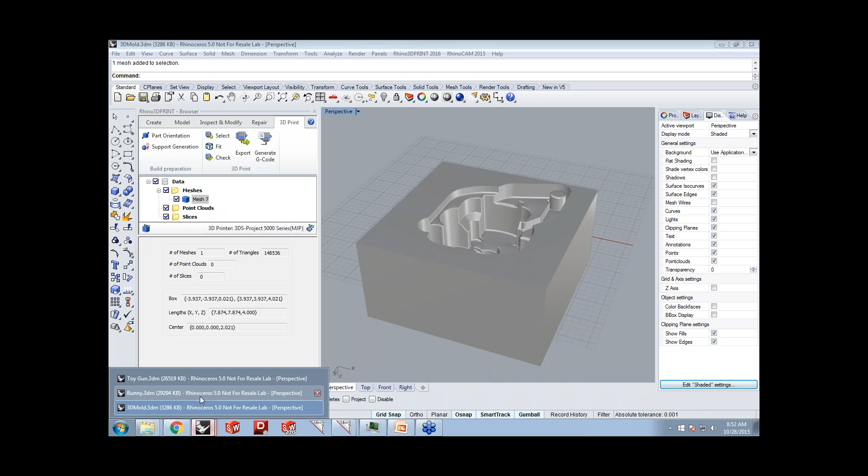Joe, would you add anything in addition to it? I think you pretty much covered it. There was one other question maybe you want to address right now. It's about the supports. Alfonso wants a little bit more information on the supports that we've added. So if you just want to go through those different parameters, that'll be great. Thank you. Sure, we'll do that. Thank you.

So let's go back into the support generation. You basically pick the mesh, and then under the parameters tab, you can specify the supports to be generated for the overhang angle that you want to determine. You specify the support options here. You can set the support diameter and sampling distance.

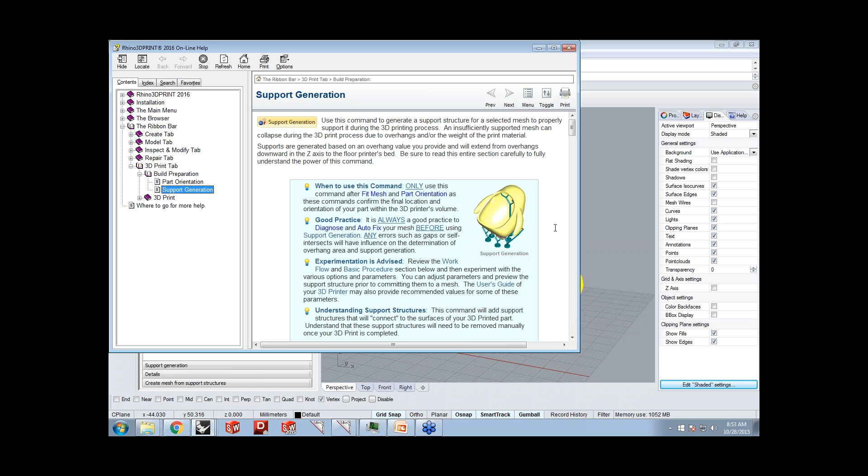Now if you go into the help system, there's extensive built-in help which describes what each of these parameters are. So if you want to learn about the connector diameters, the sampling distance, the maximum angle, you can read about all of this information in our enhanced online help document.

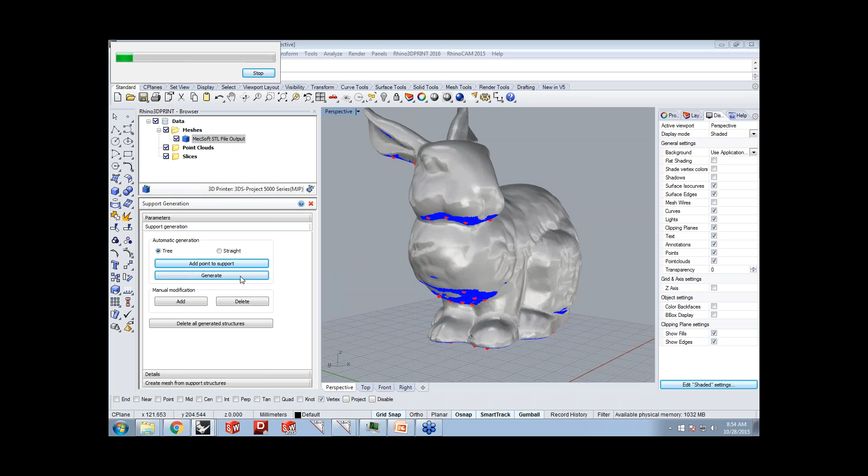So you can define all of the parameters here, and then go into the support generation tab where you click generate, and this creates the supports and previews them in your viewport. Once you have these supports created, if you want to add additional supports, you can click on add point to support, add a few points in specific areas where you think you need more supports, and then select generate again. This creates supports for the points you just added in addition to the existing supports.

And then if you go to the details tab, it'll give you the information on the volume and the length of the supports you created. Then you go to create mesh from support structures, and you can choose from three options: whether you want the supports united with the part, as a separate mesh, or a separate mesh for each support tree. I hope I was able to answer your question.

Okay, I think you did that quite clearly there.

Now, I have a lot of questions pouring in about pricing. And yes, I can give a little rundown on the pricing here. A commercial copy list price is $999, but we always introduce a little discount introductory offer when we have our new version releases. So we will be offering a 25% discount on that price for all the commercial copies.

Now, educational copies are priced at $999 for a 5-user copy, and that too will be discounted for that introductory period at $750. With lab licenses, which are the educational versions, we will also be providing a single user teacher's copy for an additional $250, which is usually $500, but we would discount that at 50% for a teacher or a professor teaching the course. Any other questions that I can cover about pricing?

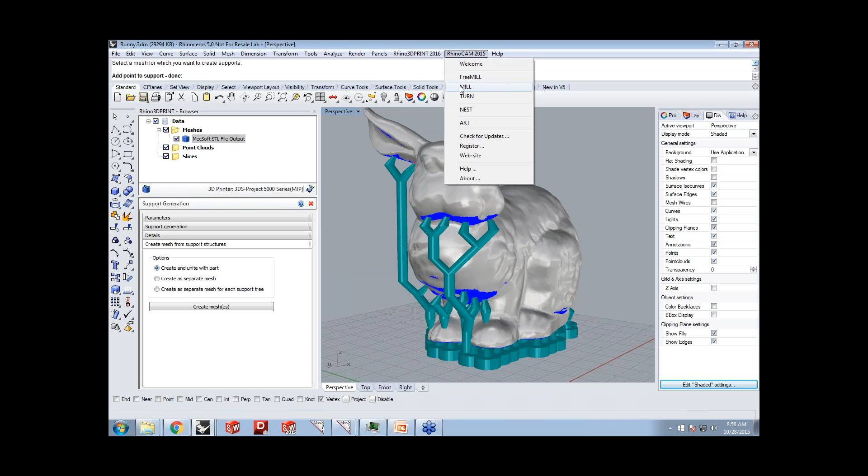Yes, you can. So once you have the mesh geometry prepared, you could go directly into our CAM modules. So if you're running it in Rhino, you could go directly into RhinoCAM and generate your toolpaths using our mill module and generate 3, 4 axis or multi-axis toolpaths, and then post-process these out to your CNC machine. So the mesh tools that are offered in Rhino 3D Print are not only geared towards 3D printing applications, they can also be used for CNC machining process.

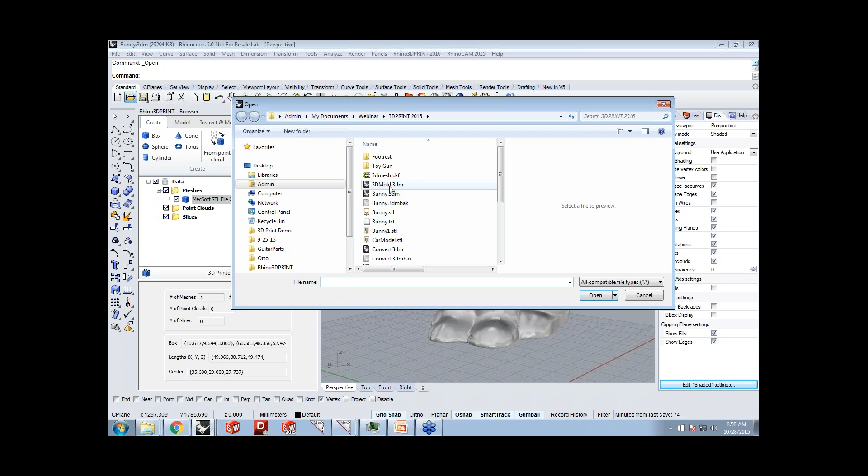Now, I have a quick example that I wanted to show you here, folks. So what I'm going to do here is just import a file. So this is basically an architectural woodworking model in here. As you can see, this was a mesh geometry that was brought in. And if you take a look at the meshes in here, these meshes are not really ready or usable for printing or even for CNC milling process.

So if you want to be able to mill this part, you would want to make sure the meshes are usable. So I'm going to use these meshes in here. You can see there's 2 meshes on the model, but they're not clean. There are several holes and several issues on it. So I'm going to do the stitch and close on these 2 meshes in here.

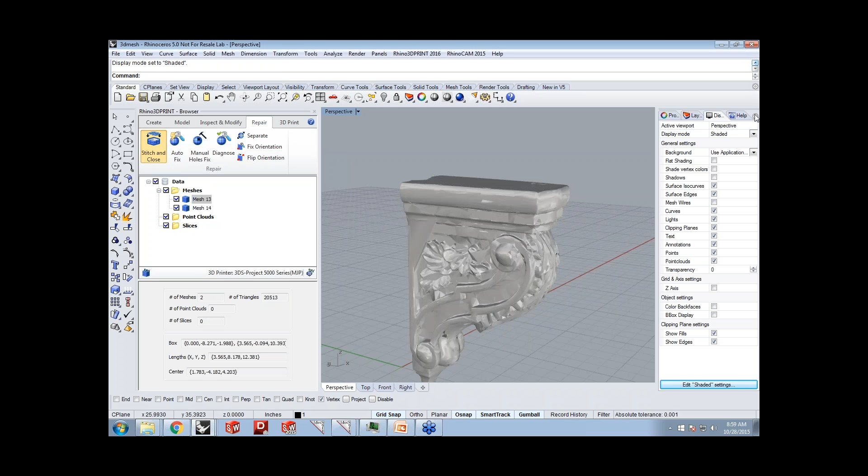And once I perform the stitch and close, I'm going to go ahead and use the tools that are offered in here. So I'm going to select these meshes, perform a stitch and close, and now the model is ready for your CNC milling applications. You may want to mill it in 3-axis or index 4-axis setup to machine the parts. So the 3D print module offers great tools for mesh modeling and mesh fixing, and it can be used either for 3D printing or for your conventional machining process.